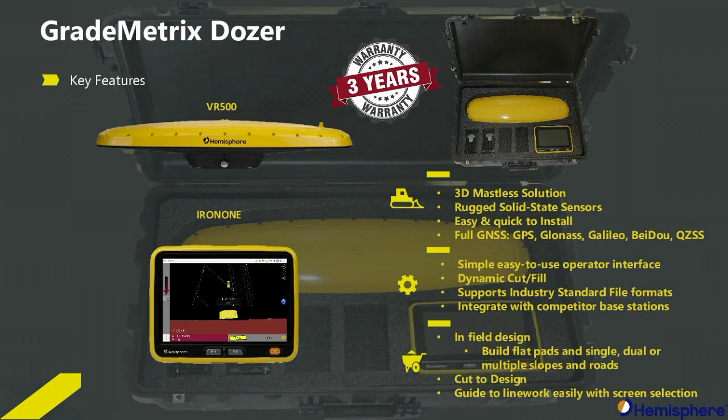So what are the benefits of these features? The major benefit is reduction. Your sites are getting done faster and more accurately. You are reducing your costs considerably on labour and fuel as a direct result of the time savings. Material costs are also dramatically reduced. You're not overcutting, which saves on waste costs and replacement material costs, and you're not undercutting, which saves on rework costs and time.

What about professional services costs? By nature, the dozer is the natural enemy of the stake marker. How much money do you spend getting survey stakes replaced after the dozer has made a few passes? What about centre lines, edges of roads, and site boundaries? What if you could do your own spot checks and set out these stakes yourself? How much time and cost could you save per week?

All of this is completed on-site using your own guidance system that is easy to use and draws efficiency gains from your operators, no matter what their skill set. You have complete control of your site. This brings me to the technology section of the presentation.

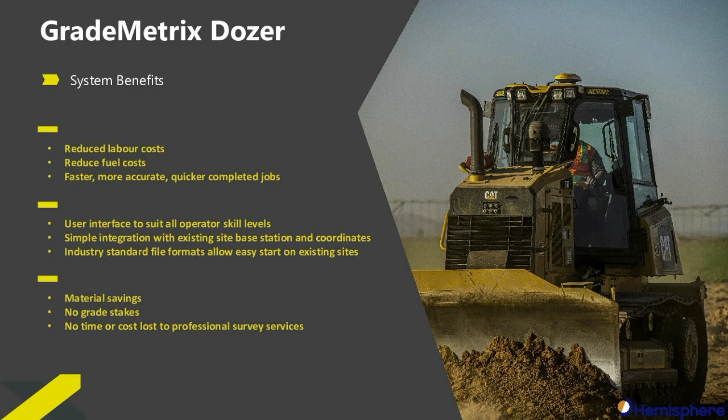But what about normal working conditions? If trees are filtering access to satellites, you need as many as possible to guarantee position and accuracy lock. In built-up urban environments, you need as many as possible to reduce the effect of multipath and blockages. And in urban canyons or mine environments, you obviously need as many as possible due to the limited sky view.

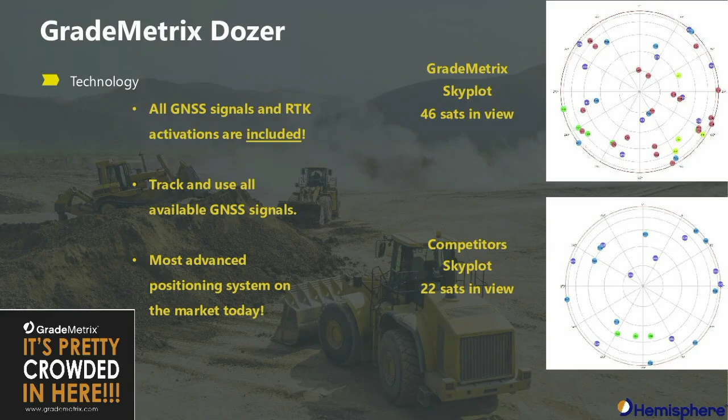A key part of the technology is the VR500. Hemisphere is very proud to present this new concept in machine guidance. Solutions in the market today are generally of two types. The first is a dual mast solution that generally uses a receiver antenna combination on each side of the blade. The end result is the most expensive and heaviest components being mast mounted on the harshest shock part of the machine.

The second is a single mast solution, which is also mounted to the blade and uses the current direction as the heading. When the machine reverses, these systems can incorrectly assume that the machine is heading forwards. The VR500 unit has a receiver and two antennas built in, along with the radio, Bluetooth, and power management. The antennas are separated by exactly 0.5 meters, which allows it to accurately calculate heading as well as position at all times.

Sensors are used on the chassis and the blade to correctly determine the slope and elevation of the chassis and the blade. The result is a mastless solution that suits all dozers, no matter how large or small, and that mounts the expensive components all in one on the roof of the cab, away from the damaging vibration of the blade. The VR500 is designed specifically for a dozer, no matter what the size, and a compact excavator.

The aim is to create a solution with a price point that for the first time is a viable return on investment perspective for compact excavators, smaller dozers for urban contractors, and heavy mine spec dozers in either blade or track reference modes. The efficiency gain available from machine guidance can now be applied to smaller machines just as well as larger units, and these efficiency gains are available at an affordable price.

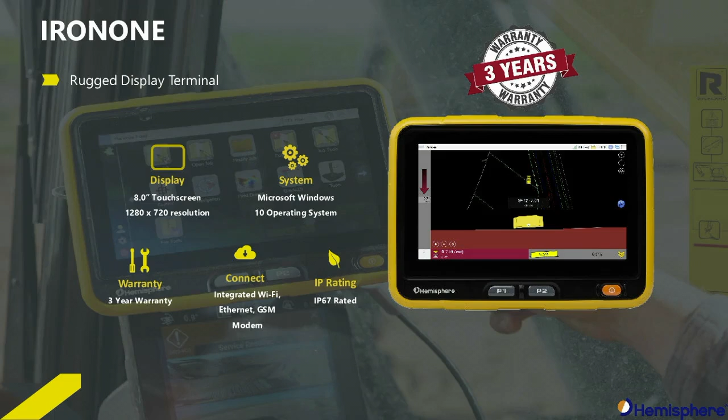We will now present an overview of the operating system of the GradeMetrix solution. My colleague Mark Brook has put together the following video to show you the functionality of the system.

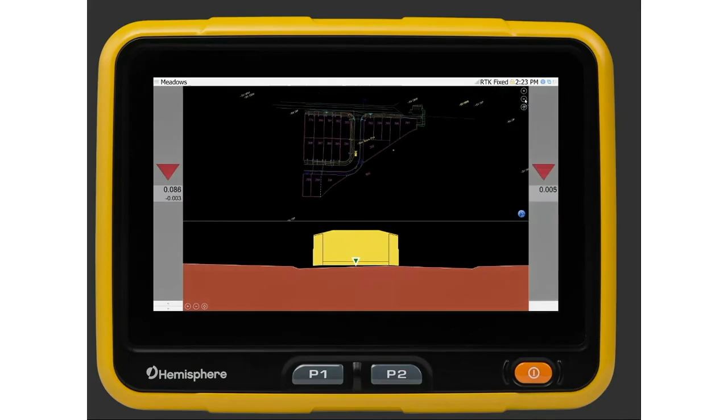We will get started here on the main user interface that the operator will see within the cab whilst operating the machine. You can see I'm positioned here on a road box. Using the 3D technology, we can move around the job site while providing real-time grade indication to the operator. As I track the machine backwards and forwards, you will see the machine position update accordingly on the top plan view. This is a top-down view of the job containing line work information similar to paper plans.

You will notice that the cross-section view down the bottom contains a cross-section of the road box. This is referencing the 3D surface model that has been imported into the job, and it will also update as the machine is moved around site, which I'll demonstrate. You will also notice on this particular view, on the left and right hand side of the screen, we have light bars or cut fill indicators. These give real-time cut fill values from the edges of the blade against the design surface.

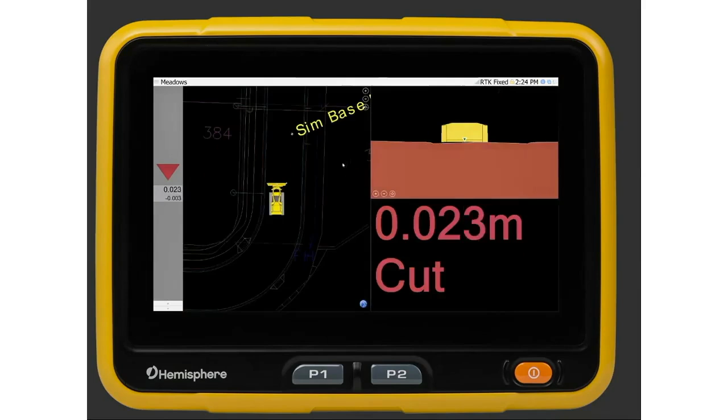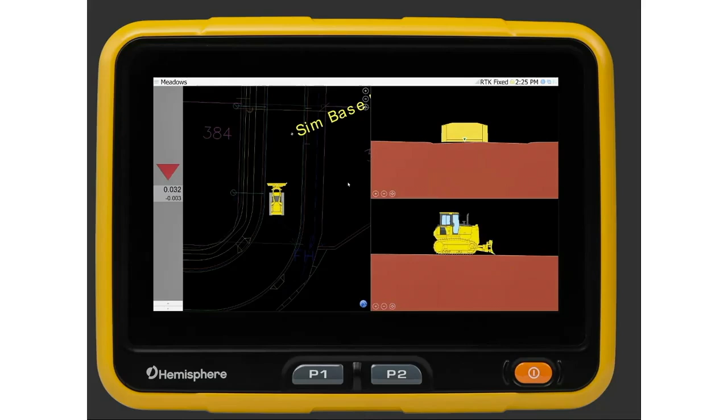Speaking of views, we have a variety of options available at the operator's disposal to assist them in matching grade. The operator can easily change between these, and often it'll just come down to preference or application. Some of the more commonly used views include the one pictured at the moment, which has plan, cross-section and a big cut fill value. Plan, cross-section and profile view, which gives a side-on view of the machine against the surface.

And the plan-only view, which gives only a single light bar with a cut fill value based on the reference point of the blade, but it also gives a more noticeable cut and fill value down the bottom left corner, as well as a current cross slope of the blade pictured on the right hand side and current cross slope of the design.

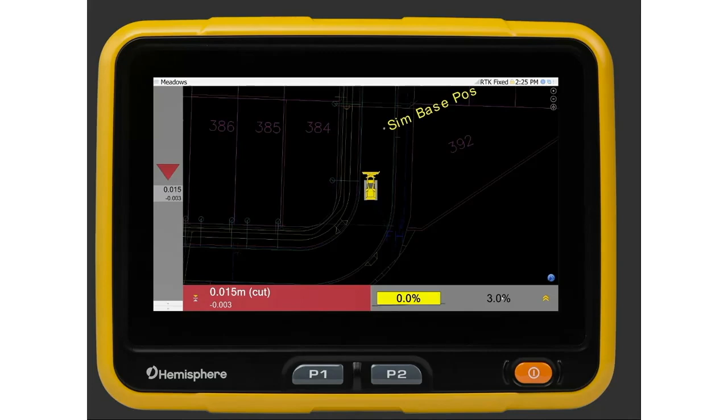You can see here that the current cross slope of the design is set to 3% due to the crown of the road, and on the next screen, which is a plan view and a cross section view with a single cut fill, you'll be able to see the representation of that 3% in the cross-section view.

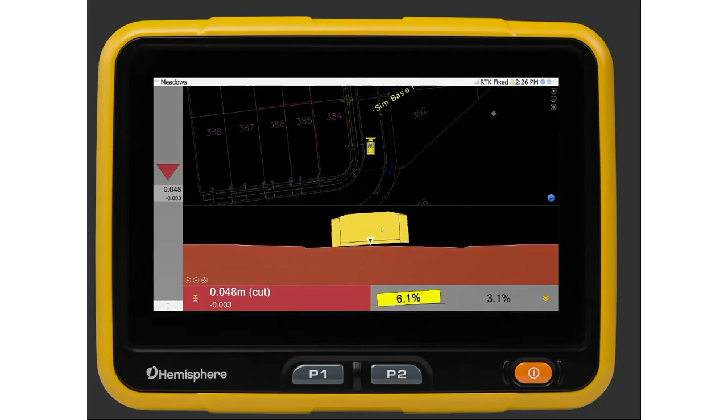You can see here now, as I move the blade up and down, the cut fill indicator on the left-hand side will change, and the numbers, which are meters to 3 decimal places, will update accordingly to show the distance to the surface. And as I start to tilt the blade from side to side, you'll notice that the real-time blade slope indicator in the bottom right hand corner will also update and show the current slope of the blade.

Occasionally the operator may want to know his current elevation to reference against the design elevation. You can do this by accessing the information tab in the top right hand corner. This also contains some other useful information such as RTK status.

It's worth noting that the positional information in this tab is based off the reference point of the blade, which is your green arrow on the cross-section view of the blade. This can be changed by pressing and holding on the blade and changing the reference point location in the menu.

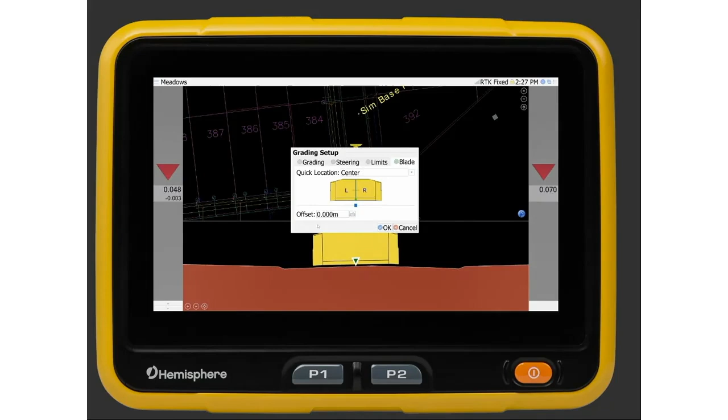Most surface models uploaded into the machine will be referencing the finished surface level. The operator may want to offset this vertically for subgrade or compaction layers. You can do this by pressing and holding on the light bar, entering an offset in the offset menu, and typing this manually. A minus value is below, a positive value is above.

You can see the light bar indications have adjusted accordingly to show the offset. It's also shown on the cross-section view with a line that's been drawn on the cross-section view. You can also use the step indications to change the offset. You can adjust the step offset in the same menu. Now you can see it's changing by 50 mil each time we press that button.

We also offer the ability to save preset offsets, which is handy for people that are changing between offsets often. We offer the ability to save 9 of these presets.

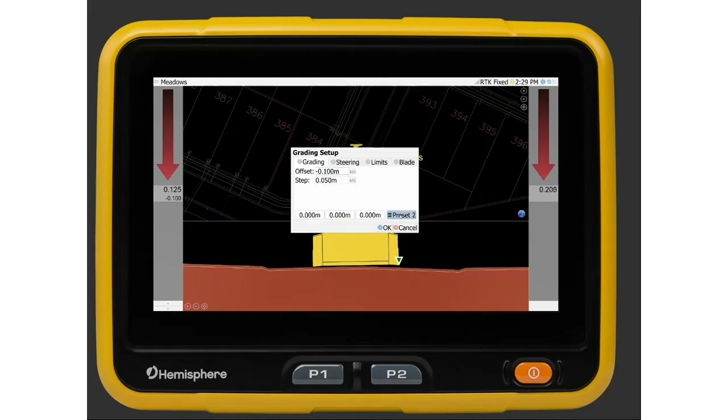In GradeMetrix, we offer the ability to lock certain functions behind an administrator password. This is to prevent operators from accidentally modifying something they shouldn't. Start by entering the hamburger menu in the top right corner and selecting the person icon in the bottom left. You can see some menus are grayed out and are only accessible behind admin password. This password can be manually adjusted within the settings.

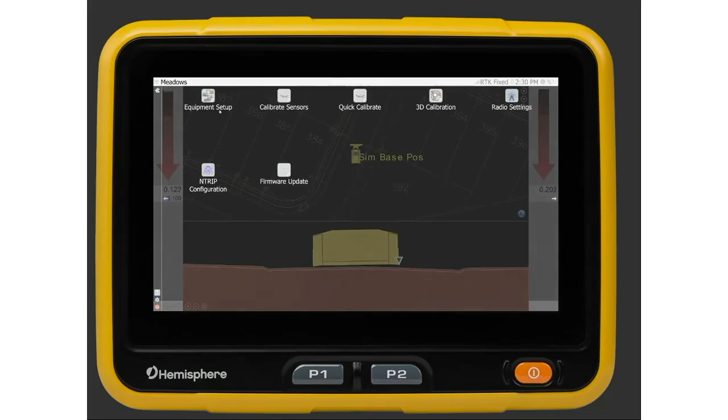We're now ready to move on to the creation of the 3D job. Enter the main hamburger menu and select New Job. Give the job a name. You can also enter in a description or notes in here for the operator to describe specific information about this job if desired.

On the next screen, you will need to bring in a localization and line work file. For localizations, we currently support the direct import of Carlson .loc file format, and we're also looking to expand this to CSV and other mixed fleet file formats in the future. If you do not have a .loc file, you can also enter the control point information manually in a later screen. Select the localization file and you're ready to move on to the line work file.

We support common CAD file formats for line work such as DXF and DWG. Consult the manual for a full list of supported file types. Next, we'll move on to importing the TIN or 3D surface model, digital terrain model, etc. Press Add and select the file.

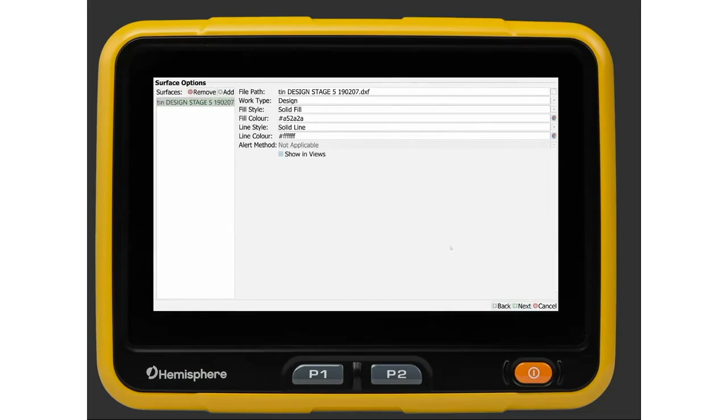We offer the ability to upload multiple surface files. Of course, the cut fill value will only reference one of these at a time, but it is useful for things such as material deposits and avoidance zones. On the next page, you're able to select your projection or transformation set if required. This should be specified to you as part of the control information from your surveyor.

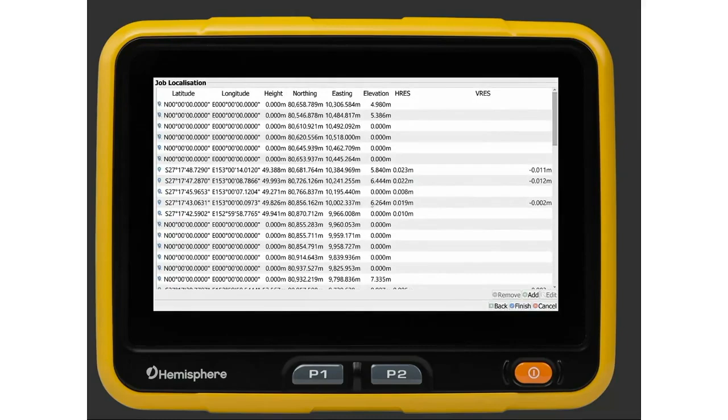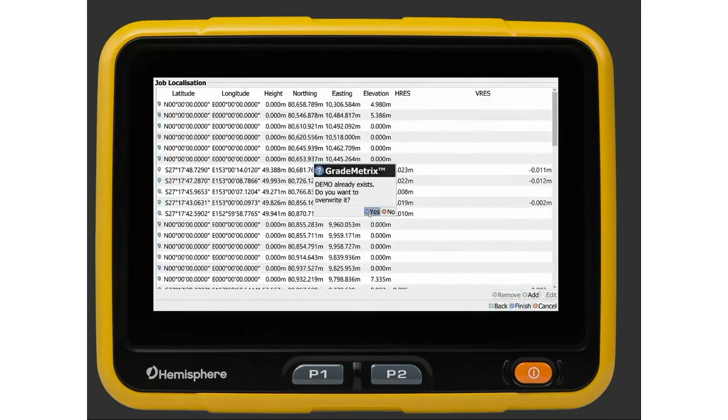Then you can move on to the final localization page, which contains GPS coordinates and references against the local coordinates of your job. You can press Add on the bottom of the screen to enter these coordinates in manually if you are bringing the data across from a third-party platform.

When there is no 3D surface or line work information available for a job, we offer the ability for the operator to create their own 3D designs on the fly. We call this field design. To get started, enter the menu and go to field design. We have the option to select flat pad, hold slope, sloping pad and ramp. I will demonstrate these starting with flat pad.

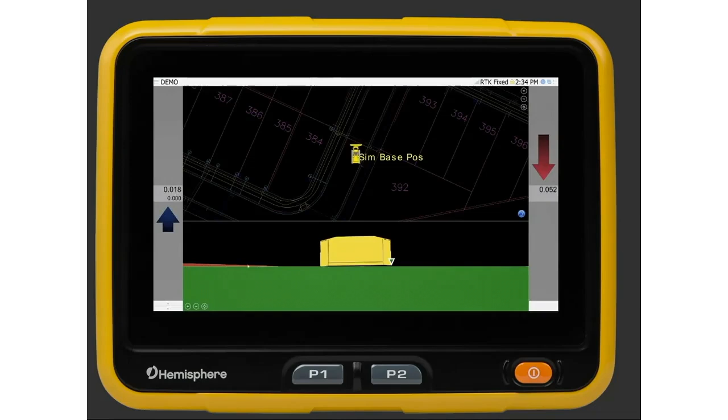All you need to do is simply give it a name, hit the record button and type in the desired elevation and press OK. You can now see that the flat green surface has been created using the field design and has been overlaid over the existing surface model. When a field design is created, the cut fill indicators will now reference the field design surface rather than the original DTM.

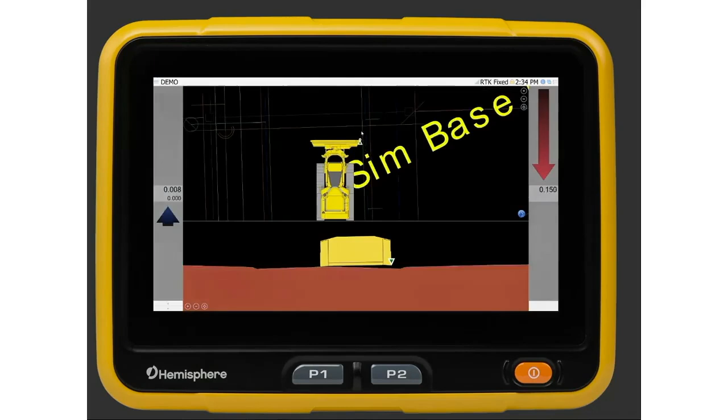To demonstrate hold slope, I'll quickly first backtrack a little bit and demonstrate how to select and steer to a guideline. Press and hold on the desired line. In this case, it is a lip of curb line, and select Use Guideline. This will now provide a distance indicator between the machine reference point and the line. It also shows the chainage along that line. This functionality is used as part of the hold slope field design.

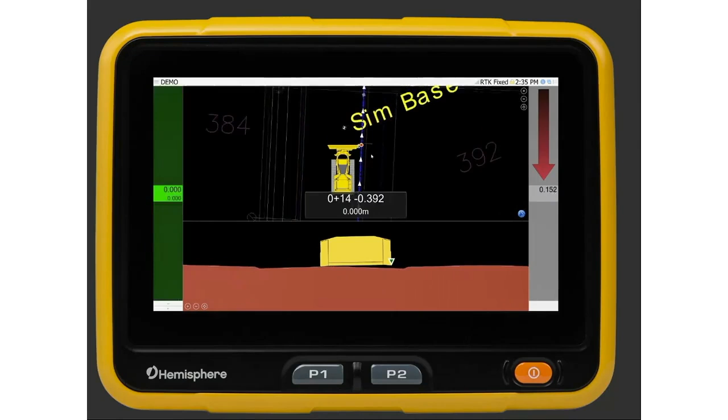In the grading setup menu, you can set an offset in order to offset the line horizontally, which can be useful for offsetting boundary lines, trenching profiles, that sort of thing. You can also change the reference point of the blade that your horizontal distance indicator will reference to the line.

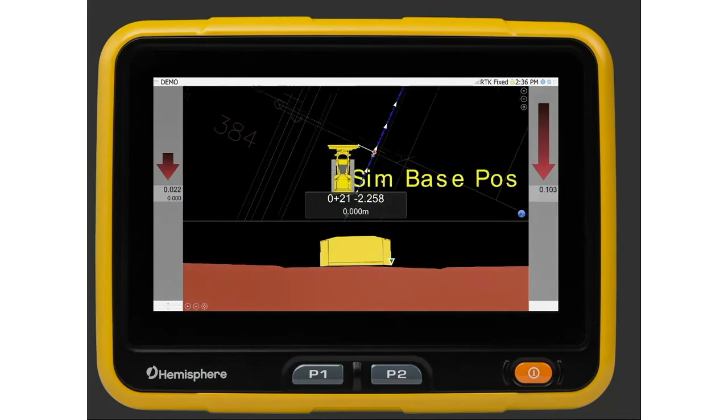Once you have the guideline selected, you can head back to the field design screen in the menu and enter the hold slope function. Now the hold slope function is playing up here a little bit on my simulator, but essentially all you need to do is record a point based on the location of the machine, and it'll extend the grade of that slope.

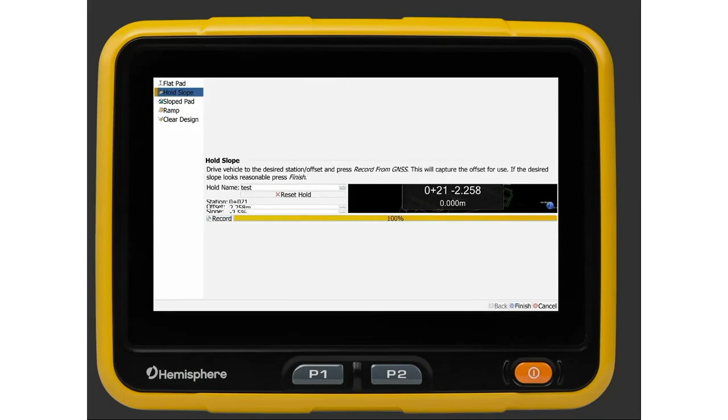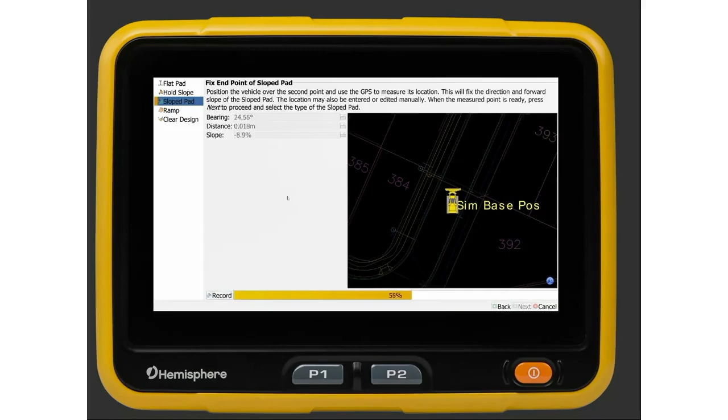Sloped pad is very simple, much the same as a flat pad. Enter the sloped pad field, enter a pad name, press next. You can take your first point, record a first point, record your second point. You can enter those values in manually too if desired, and create an infinite slope pad at that heading and slope.

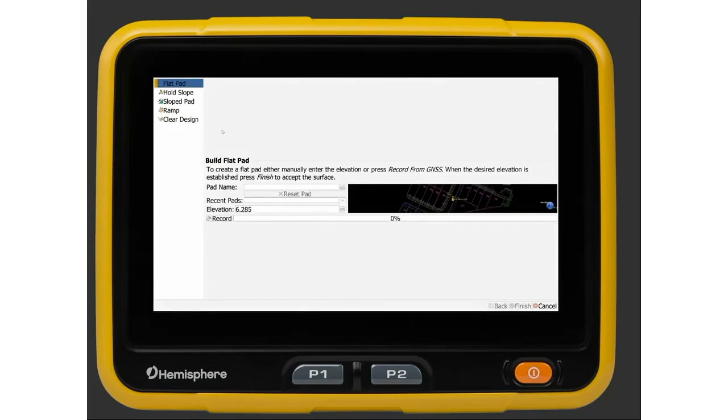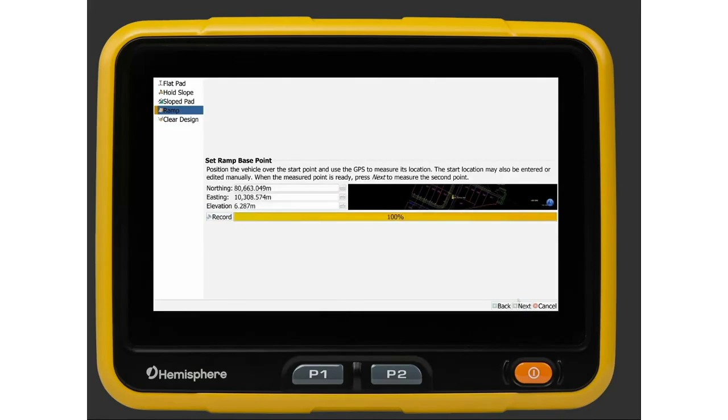Using the ramp field design, I'll demonstrate to you how it can be used to create a crowned road design. First, set a ramp base point. Then record a direction and forward slope. These values are incorrect as it's the simulator throwing funny values, so just ignore that for now.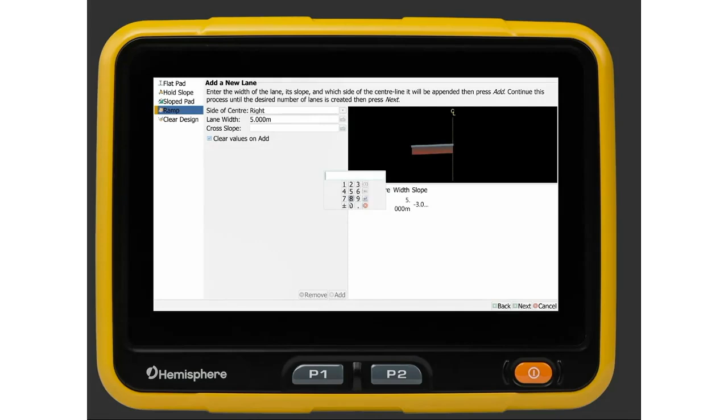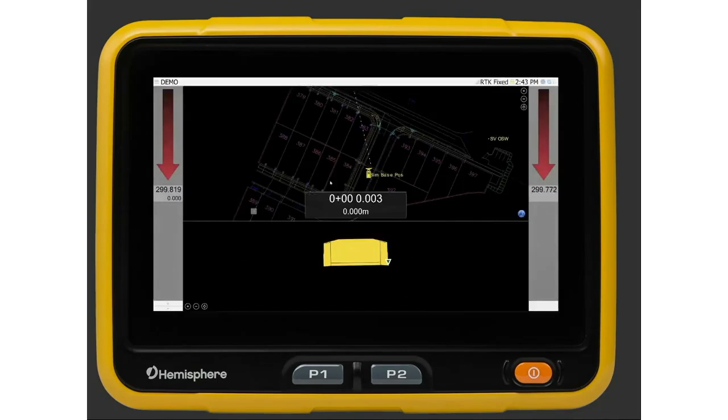Then you can add a new lane, so on the left hand side I'll add a width of 5 meters and a cross slope of 3%. I'll also do the same for the right hand side. You can preview the ramp design and finish. Now you can see it's created a crowned road design in that direction, which is the pink surface.

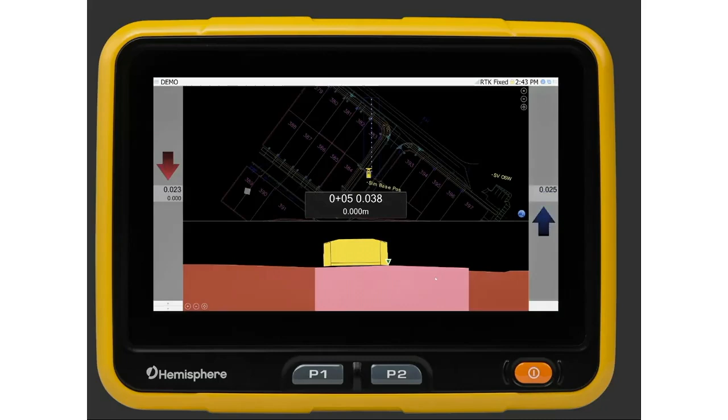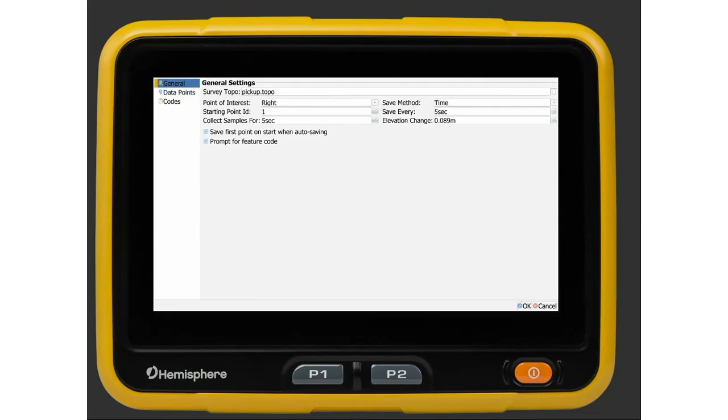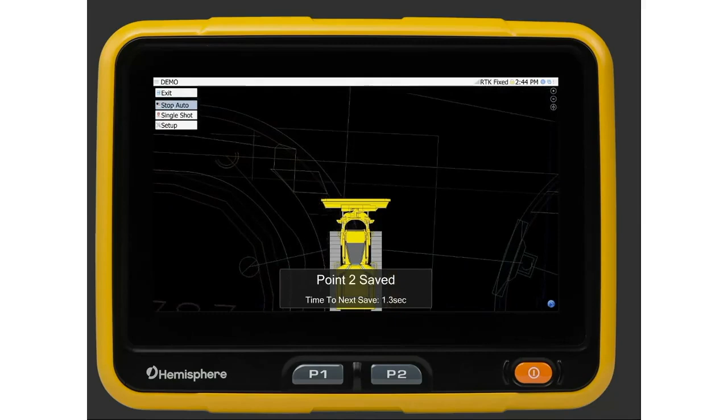In GradeMetrix, we also allow the operator to perform basic topo functions. To do that, select the menu, topo, enter a name to save the points as. Choose a point of interest, which is the blade reference point, and a save method, which can be either by time, distance, or manual. In this case, as an example, I'll change it to time and save a point every 5 seconds. Press OK and start auto. And every 5 seconds, it will take a topo shot and save it to that point file.

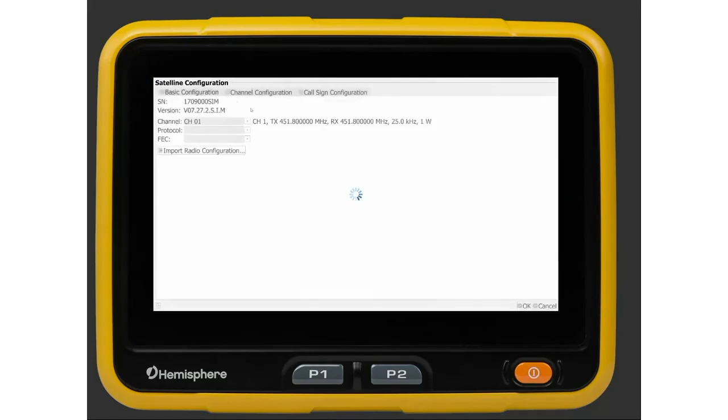We've also made it very easy for the operator to access radio and NTRIP settings for corrections. Just enter the radio settings here in the main menu, second page, and NTRIP settings as well. This is used for an NTRIP correction service, VRS service, etc.

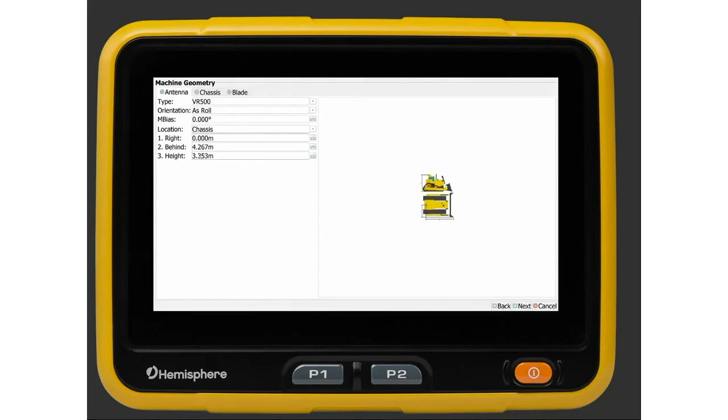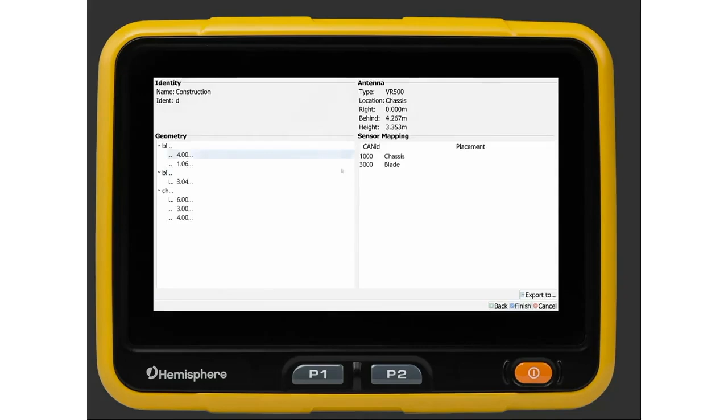One major advantage of GradeMetrix over other competitive systems is the calibration and installation process. I'll just quickly go through the machine measure ups with you. You can see here for a dozer we can select a VR500 antenna, and there's a few measurements here. They can all be performed with a measuring tape. Sensor network, you set sensor orientations and a summary page. You can also export it from that screen as a backup.

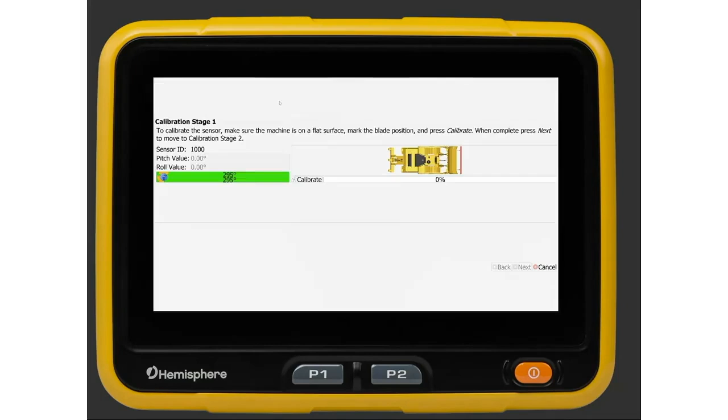Then you'll need to perform a calibration. Simply park the machine facing one direction on a flat surface, press calibrate, spin the machine 180 degrees, put the blade on the same mark, press calibrate, and your sensor calibration is complete.

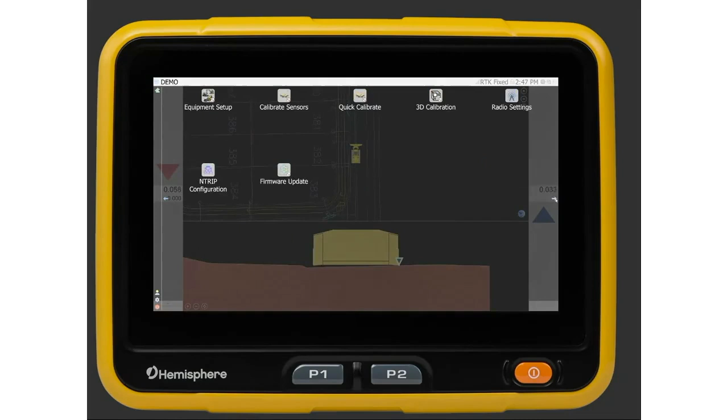Finally, follow the 3D calibration wizard to perform the 3D calibration of the dozer. Unfortunately, I cannot demonstrate that to you on the simulator, but I can assure you it's a very straightforward process and will not take any more than 10 minutes.

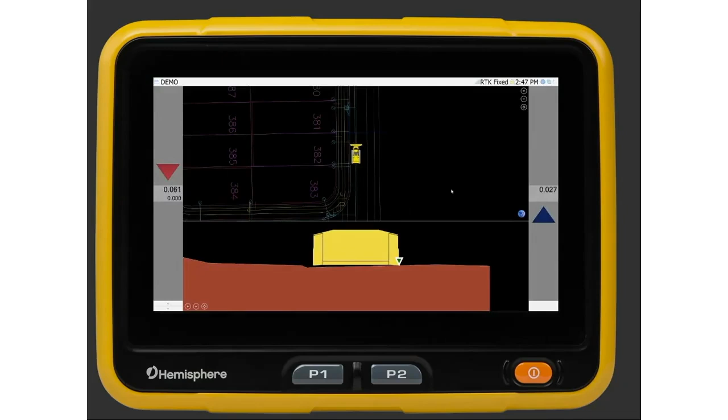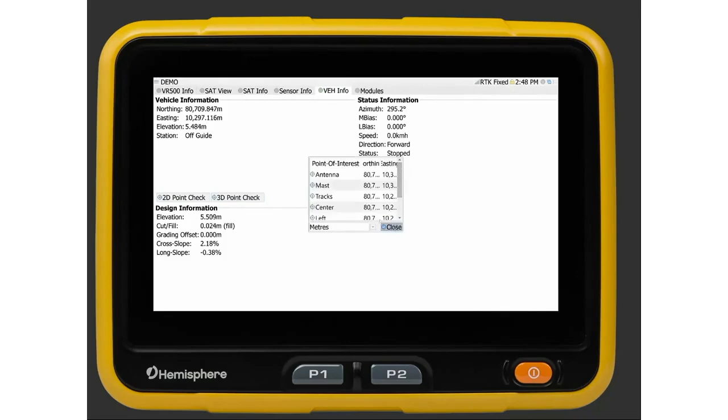And finally, we have the diagnostic screen, which is accessible from the main screen view. Hit the icon in the top right hand corner and you'll get some diagnostic information that's accessible to the operator. Clearly indicates total used satellites, RTK status. We've got satellite view, shows you all the satellites, sensor information, vehicle information, 2D and 3D point checks here for doing checks against existing points to confirm accuracy, bench checks.

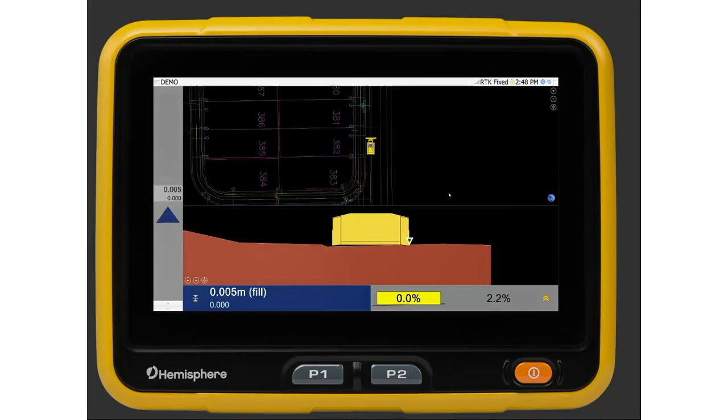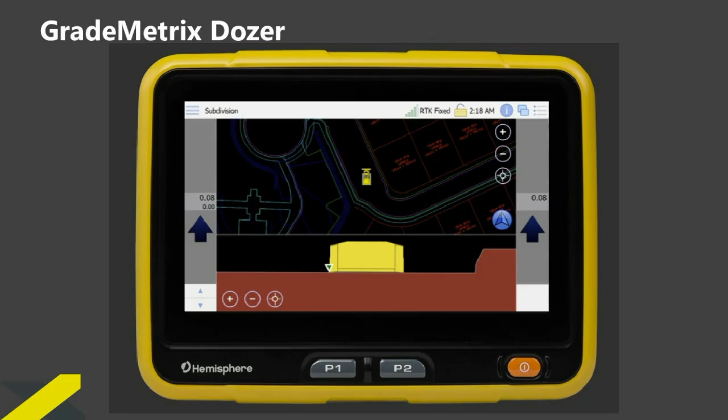Okay, so that brings us to the final summary. Hemisphere is very pleased to be releasing the GradeMetrix dozer solution that you have seen demonstrated here today. It offers a new mark with regard to performance and simplicity at an affordable price and is available for evaluation through our dealer network today.

The affordable price point makes the system a viable investment to unlock efficiency and cost savings on your site. The barrier to entry for a large sector of the contractor market is now lower, opening this valuable tool to a larger audience for whom the price has previously been prohibitive. This value is provided without compromise on performance and without an array of costly options. It comes with full constellation and inbuilt modem.

Installation and calibration can be completed in little more than half a day, minimizing your downtime. And the system is provided with all firmware and software updates without subscription and a 3-year warranty on all main components. The mastless nature of the setup means that your expensive, heavy components are not on masts at the end of your blade, and you don't need 2 of them.

Benefits are available in all guises, including track-based guidance and blade-based guidance. For example, consider applying this technology to stockpile loaders for height guidance at the base of the stockpile. The solution increases efficiency across any size of dozer, from the smallest to the largest, and increases the efficiency of your operators no matter what level of skill.

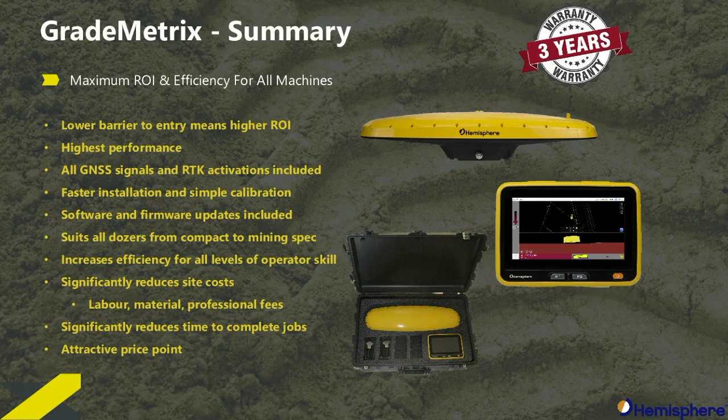So what is the price point I've been referring to? The GradeMetrix dozer solution is available to you through our experienced dealer network at a price of less than $40,000, including all options and a 3-year warranty. I'd also like to add here that we're currently investigating a financial package that will allow you to acquire the systems on a monthly basis. Typical pricing for that will be around about $500 per week, and you'll own it in 2 years' time.

So in conclusion, contact your dealer or contact us and we'll put you in touch with one of our dealer partners. Invest 15 minutes of your time finding out how fast we can have you trialing a system and starting to save money. You should also be aware of the government stimulus initiative currently available for purchases before June 30 this year. All acquisitions can have the entire cost depreciated this year. If you purchase the system this year, you get your tax back within months.